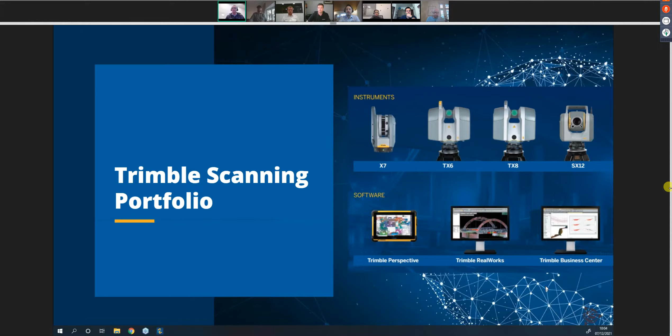So you can ask questions on all those hardware, software, and even more if you want, and we will do our best to answer the question again.

Just a few things I think it's important, because sometimes we see people are not always using the latest build. So just a reminder that we released last week a new version of Trimble RealWorks, version 12, and Trimble Business Center, version 5.60, also Trimble Perspective. That version number is a bit more difficult to say, but 2.1.3.1474, with a new firmware, and Perspective Mobile also.

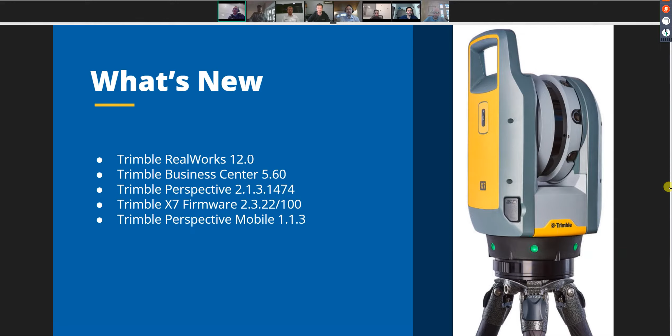Having said all this, just a few slides about Trimble RealWorks 12.0. We introduced a new pipe modeling and editing tools. We also made some redesign. One feature that's very much appreciated is the automatic moving object removal, so you can remove a moving object automatically, and a few more things were created in that release.

And for the Trimble X7 and the new firmware, we introduced a new indoor high productivity scan mode. It's really a mode that we developed and released because, listening to you, there was a need for many of you to have a faster scan mode, especially for indoor applications. So it has to be used indoor most of the time. But we really see a big productivity gain, up to 40% in some cases, depending on the number of scans you will make. So really a mode that's very much appreciated.

So if you haven't tried it or don't know about it, if you can install the latest firmware, you can see the version number here on top, as well as Perspective software, you will really enjoy it.

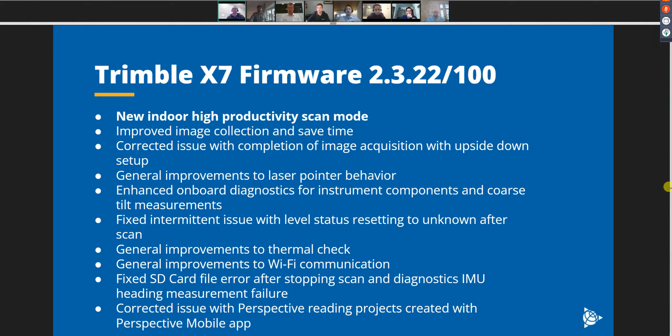And so you can see the minimum requirement for the firmware and software to have a go at that new indoor mode.

So also a few slides. If you don't know how to use it, you go to your settings, to the scanner, go to indoor mode, activate it, and then you'll see a new mode in your scan settings, like a 1 minute scan mode. It's a bit less actually, and then you can launch it.

So by default, the image capture is off because the goal of that mode is productivity, but nothing stops you from taking pictures. Have a look, have a go.

If you have questions, if you're based in the UK, you can contact Melvin. If you're in Australia, contact Ross. Based in France, contact Gilda. They'll be more than happy to answer those questions for you.

So that was it for the quick presentation. I don't know, is there already some questions? Again, it's an Ask the Expert session, so we are here to answer your questions. Please don't be shy, all questions are good.

In order to maybe break the ice, I will share a little bit about Perspective. If I can move my screen so you can see it, that will be good. But again, please ask your questions, that's the goal of that session.

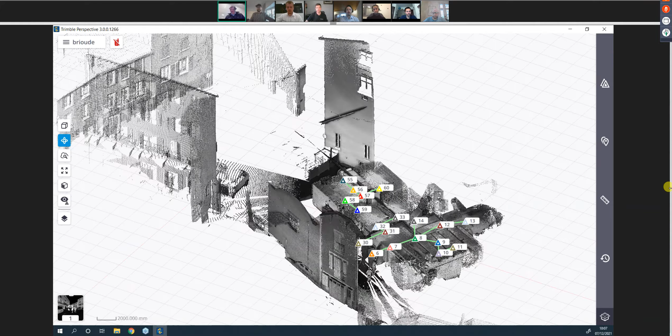I don't know if I'll be able to see my screen shortly. Can you see my screen? Okay, perfect. So I just wanted to show a little project that was made by a customer in France.

It's like a small city. So they did the road outside, then they did the building itself. If we look at all the stations like this, you can see they did several floors: the basement, first floor, second floor, and so on.

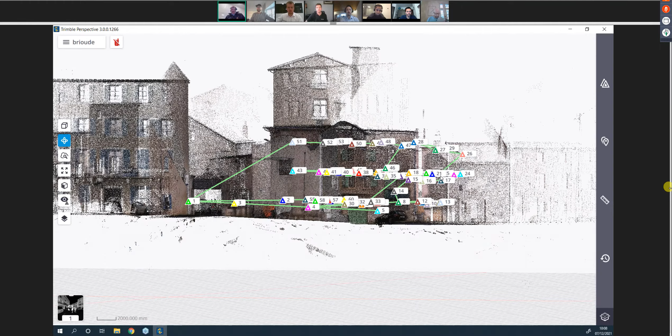What's interesting, if you didn't know about Perspective, by default you always register to the last scan. So you can go around the street like 1, then 2 registers to 1, 3 to 2, and so on. But sometimes you'll go inside the building, continue your job, and maybe you don't want to register to the last one.

So in Perspective, you have an option. Unfortunately, I'm not connected to a scanner, but we can go to register to a specific station.

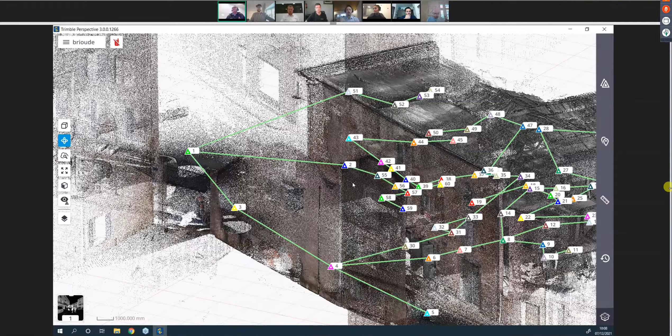So here I just wanted to highlight this. They started going from station 1 to station 2, and then for 3 it was moved somewhere else, and 3 had to be registered to station 1, for example. That's key if you did a traverse with a total station in the past, it's like doing a backsight foresight in a way, where you can just register like this.

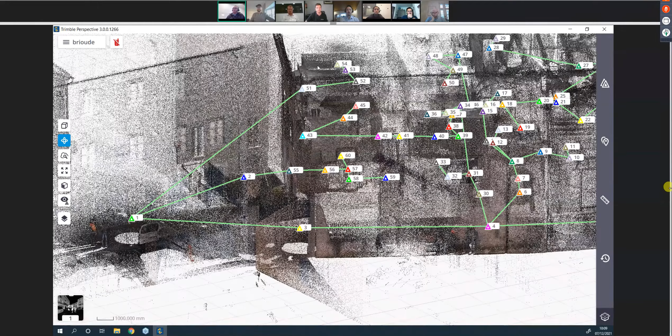A good example here is the one on top. They went to the corner of that building, station 51, and opened the window. It's always a good idea when scanning inside to open the windows so you can also get points in common between the outside and the inside. And they registered 51 with station 1.

So we need to make links that make more sense. That will also help a lot with the refinement of your project. So please, if you never did that, it's a good way to do this.

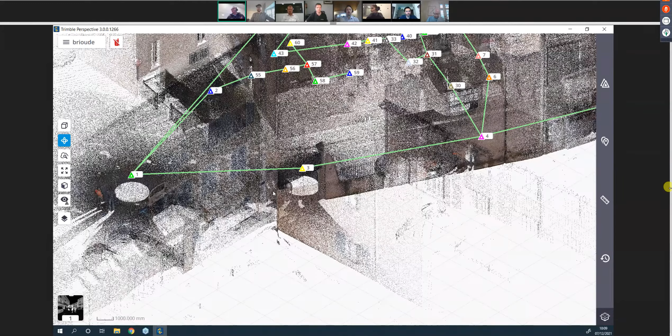Something else I wanted to show that's very useful: if you go to your stations here, in Trimble Perspective you can make annotations. Many people use annotations for feature coding, tagging a point in the point cloud to say that point is a fire extinguisher or a broken glass or whatever. But there's also something called labels.

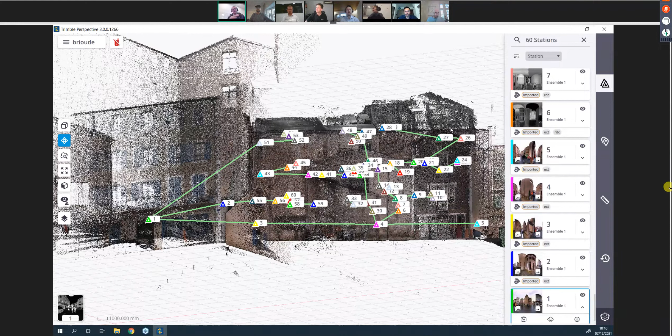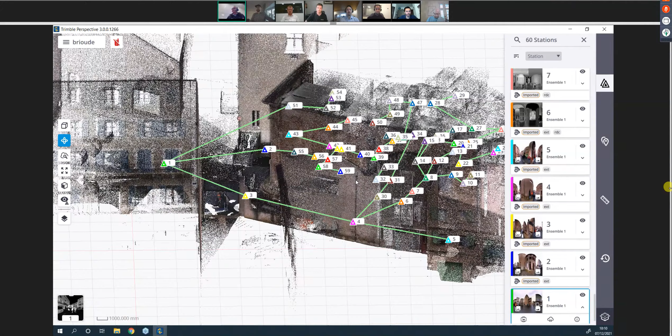With labels, you can tag a scan, like all the scans for the first floor, the second floor, the top floor. That will help you filter your scans in the office or in the field. For example, if you wanted to see all the scans made outside, I can just press on 'ext', that's a label.

And Trimble Perspective will only display the scans that have the same label. So it's easier afterward if you want to analyze what you did, same way if you wanted to see all the scans made on the second floor, for example.

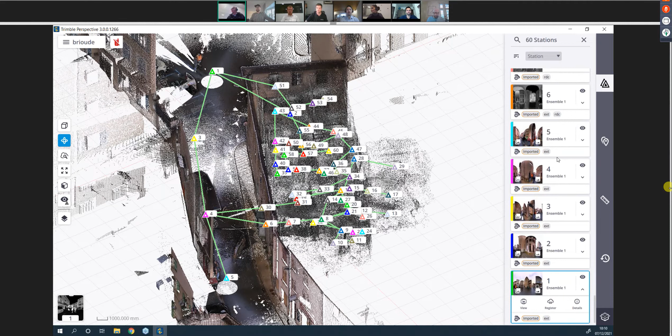So I need to find in my list only for the first floor, the RDC, the rez-de-chaussée in French. That's all the scans for the first floor. So again, try to use labels in the field, especially for complex projects like a building with several floors. That will really help you afterwards.

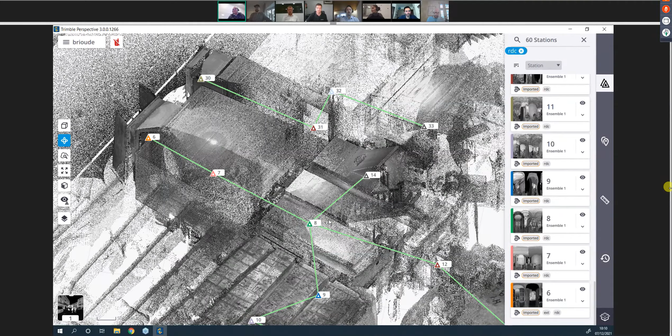Let's say if you go back to station 8 or in that corner, maybe I need to register that scan to station 7 or to station 31, for example. So it's a great tool to use here.

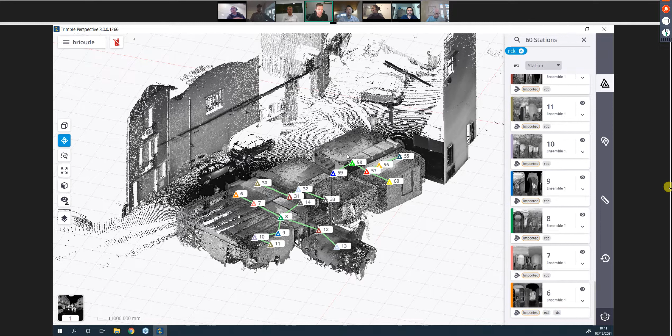I don't know, Sophie, if you see any questions so far. Just to point out as well, Arnold, a feature I like within Perspective when you're doing different floors is setting the radius. So it displays only the last 5 scans, or the radius of the last 5 scans, so when you're going upstairs you get the scans from below and above. It's quite nice to just display the last 5, else it gets a bit too much to see at once.

Yeah, that's a good point. And you see the default is 5, but you could put 10 if you wanted, or less. That's a really good point.

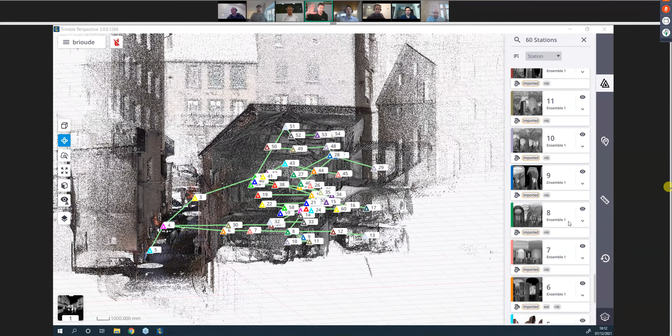Also, just to point out, when you're inside the building you see the roof. There's a setting within the layer button to switch off the roof and the walls, so you don't display the ceiling, making it easier to see the point cloud.

If you go on the left-hand side, Arnold, the layer button, we can switch off the one with the cloud - yes, see inside. So it just helps to see inside the building more.

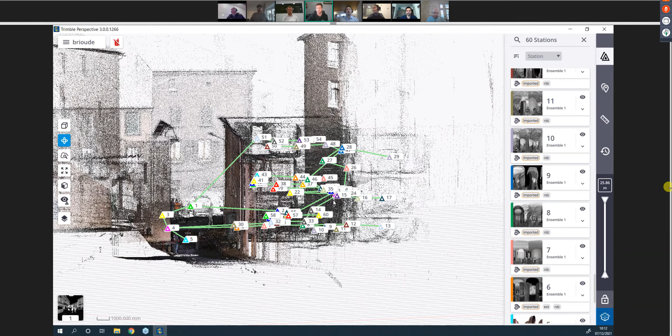Some tips I like using, showing customers on site. That's a good one, very good. We use that a bit for internals.

The only thing is if you have a scan on the outside, you'd have to turn that off to see the inside, because what it turns off is the points between the scanner and where the camera essentially is. So if you've got outside and inside scans, it's best to split the two up - have your outside, turn that off, then just see your inside. Splitting your floors into groups helps as well, like you were saying.

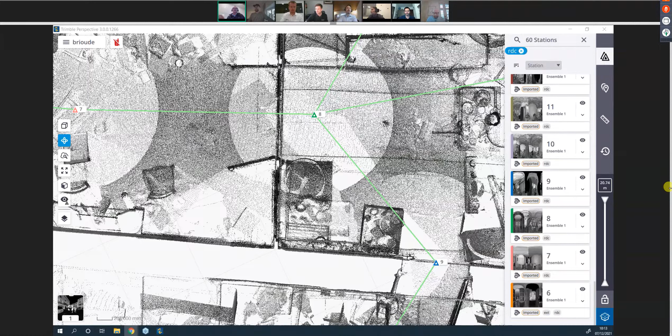Yes, the first question, do you want me to just read it? Oh, I think, Sophie, we can see the question, and the team can answer the questions themselves if they want to. We have quite a few already. So the team, I spoke already quite a lot, so if the team can help me now pick the questions and answer them, that will be perfect. And for the attendees, please continue to ask your questions - I'm going to be more than happy to answer them.

So Stephen, if you wanted to answer the first one. Sure. There's a question: what's the highest tripod for X7 that you're recommending? Well, that's a good question. There's not really a recommended height that we're using. I have seen on LinkedIn certain setups where the X7 was pulled out 3-4 meters on a truck, let's say, doing a scan. So if the scanner is stable enough during the scan, there's no limit on doing this. That's the answer to that question.

Thank you, Stephen. We've done work up in ceilings on 5-meter extendables that are sort of at their limits, and we've got customers who've done that. But it can be done. Going higher than that, you really need to be careful of your stability and what's going on around them. Thanks, Ross.

There are some more questions. I don't know if some of you want to - so yeah, I've got a customer asking how many retros do you recommend to use on site. He's saying they normally have 2 targets and a nail on the ground. Yeah, obviously shooting the nail on the ground is not as easy to shoot, so you're going to get your accuracy not as good.